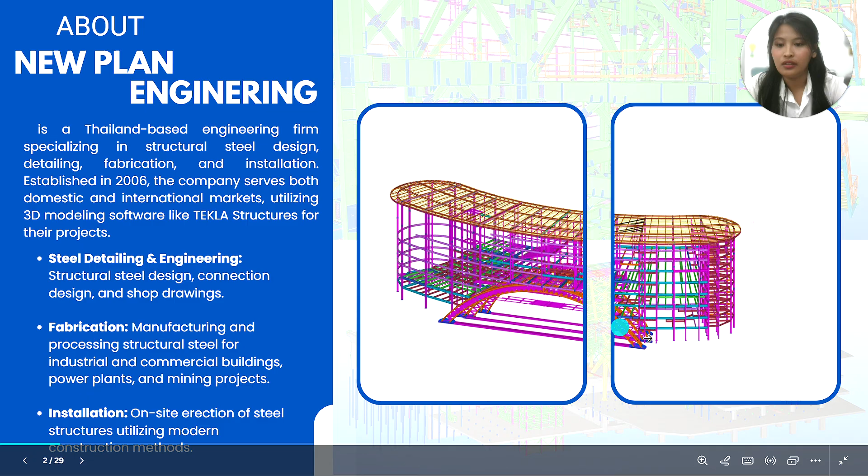So let's talk about my company. My company is a small engineering firm specializing in steel design, detailing, fabrication, and installation using Tekla Structures. And about that, Tekla Structures is a BIM software used in architecture, engineering, and other industries.

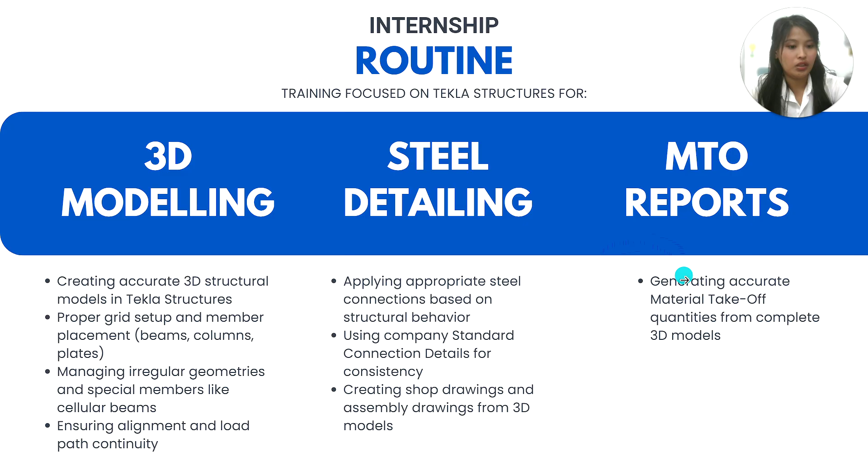So my internship routine includes four. The main one is creating 3D models, like creating accurate 3D structural models in Tekla, like setting up the grid map and placing the members. And next one is detailing. It's when I add the steel connection based on the structural behavior and based on the reference or the STD standard. Another one is MTO report where I generate the material takeoff quantity from the 3D model.

And the last one, the optional one, is drafting, the shop drawing, where I prepare the 3D shop drawing for the 3D model.

My project workflow is like this. So first they will give me a project. The first thing I do is check the drawing and the specification. After studying that, I will do the 3D model in Tekla Structures. And creating it will actually take 2 to 3, depending on the project. And after making the 3D model, then I add the steel connection if needed.

Okay. Next is the generation of shop drawing. This is optional depending on what I'm assigned. And the other option is the MTO report. And that's the summary of what I do in the workplace.

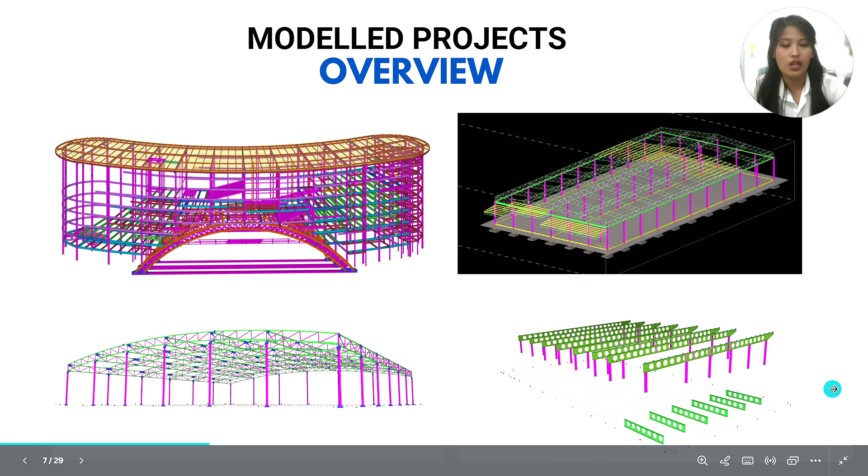Next one is the cellular beam warehouse, which I did the 3D model for the material takeoff. So this is my first time making a cellular beam, which is quite challenging, but it is manageable.

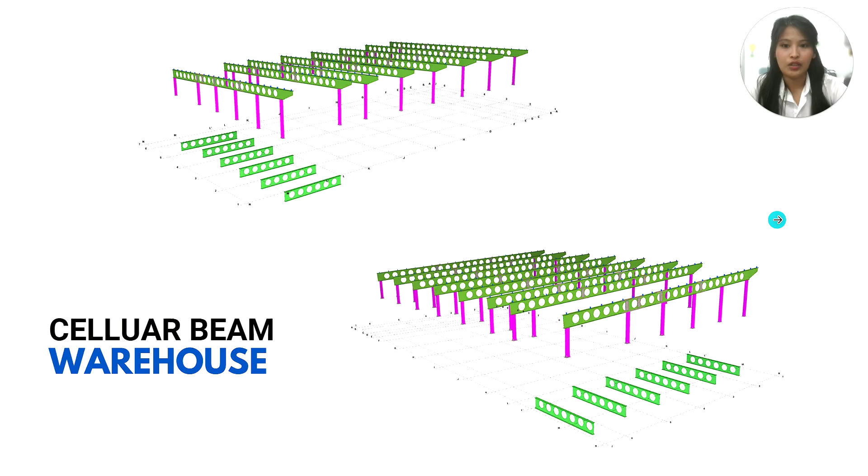And lastly is the TK Park, which took the longest because it took me a month to finalize the 3D model and add the details. So for this one, the most challenging part is the grid line since it's not symmetric. So it was challenging making the grid line for this kind of geometry.

Another one is the arch. Here it has four, which have different sizes. And I also did the stairs detailing as you can see here for the levels of this model or project. For this one, I did the 3D drawing, steel detailing, I added the steel connections, and lastly, I did the MTO report for this project.

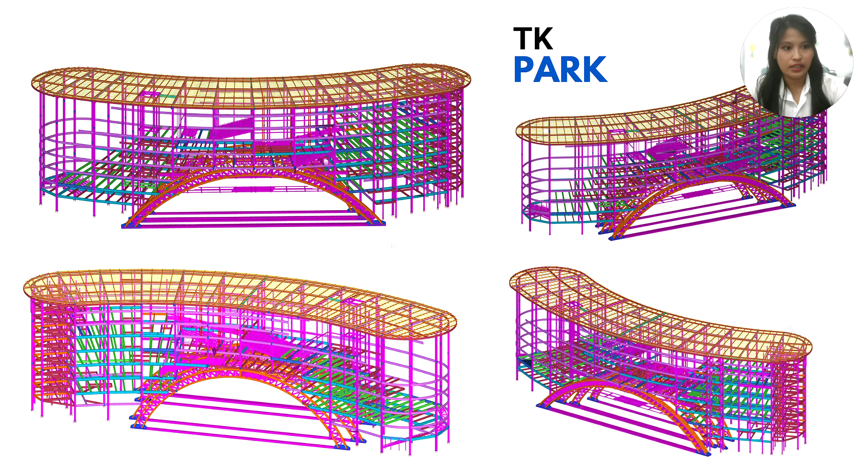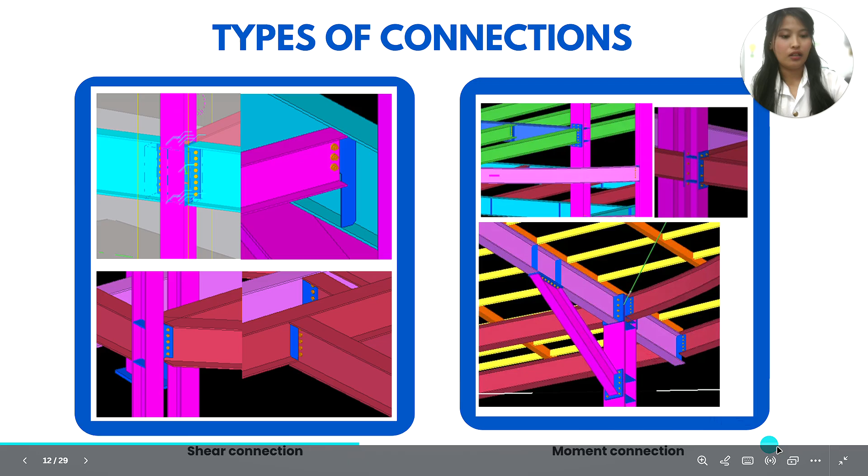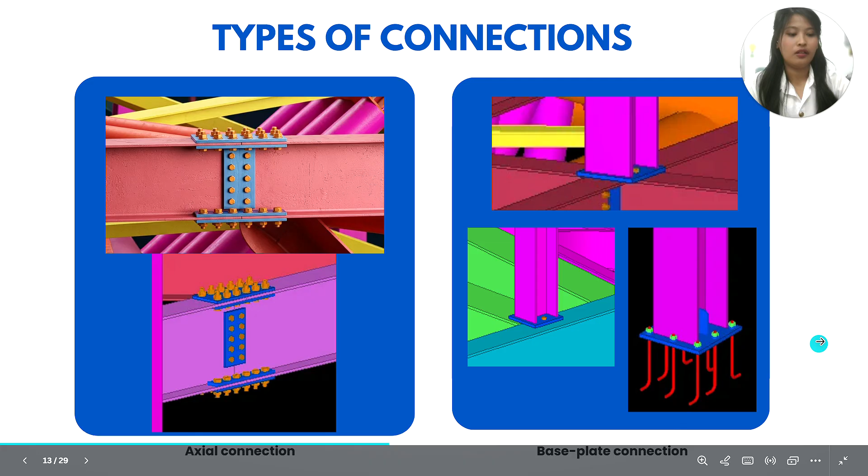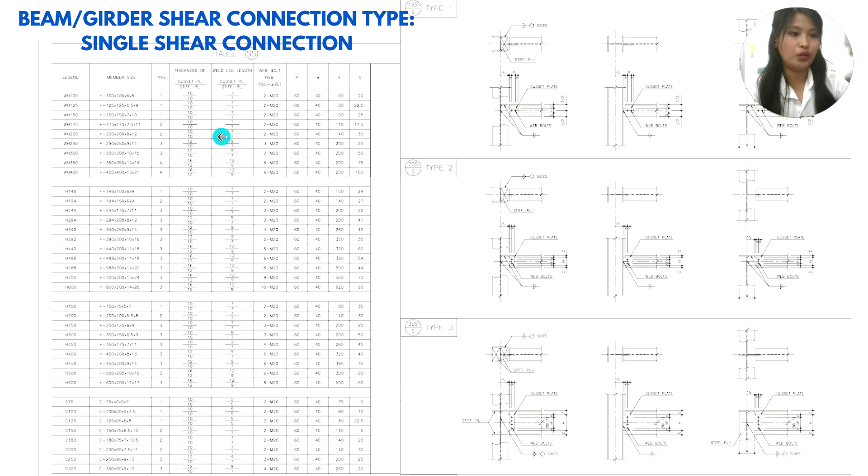So you can check here what kind of member and the type, if it's major or minor. It also shows the thickness of the gusset or stiffener plate here, as well as the number of bolts and the size. You can just follow this and input the information in Tekla Structures.

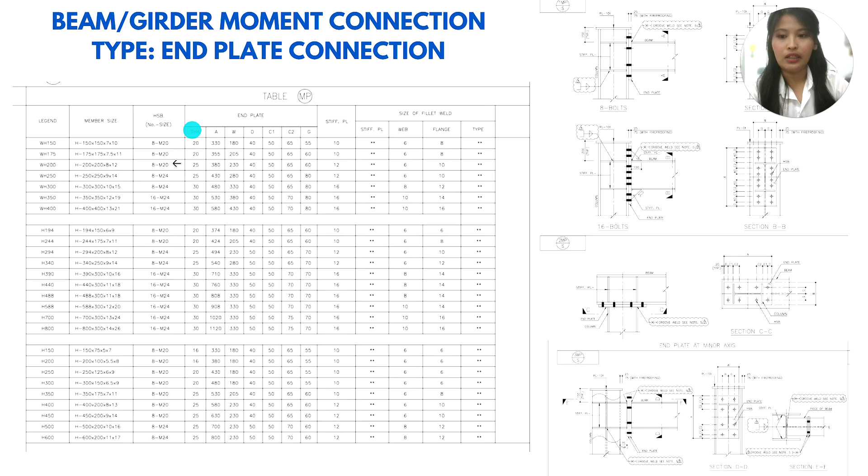And the next one is for the moment connection. This is for the end plate. Here's an example. It looks like this. As well, same, you can see the member size, the size of the bolts, and other information for the type of connection. And this is the actual connection.

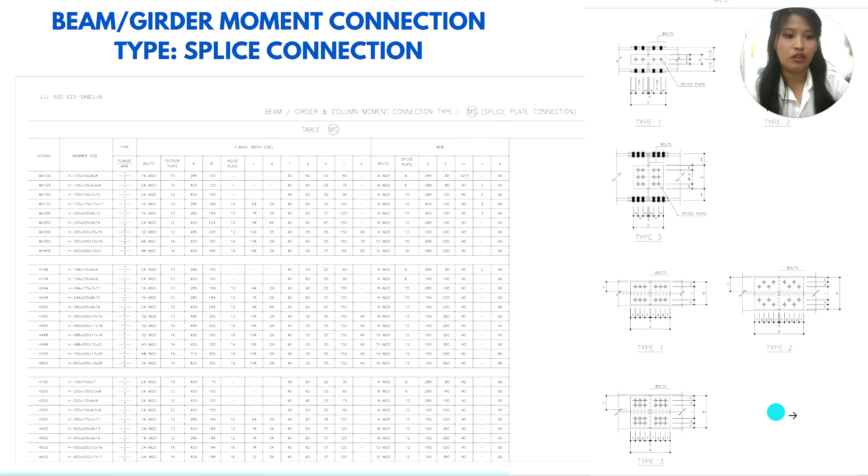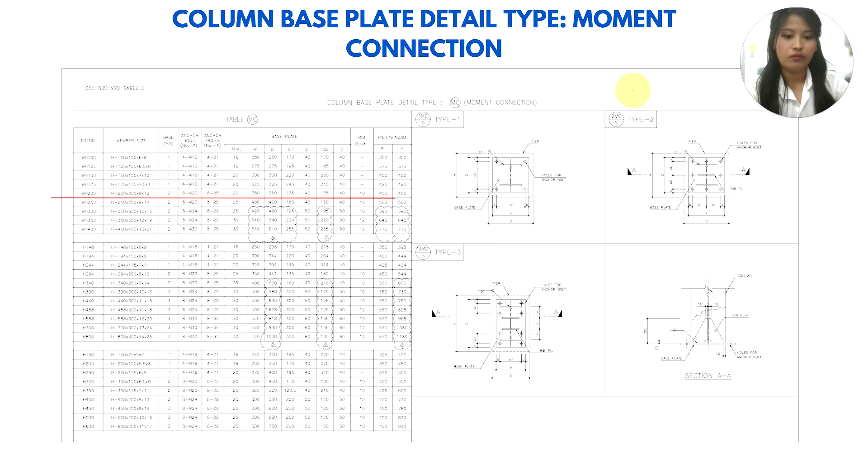We use the splice connection. You can see here. It connects two beams or several beams together. The last one I follow is for the column base plate. This one is for moment. Now for the moment it has anchor rods, and this one is for the base plate for hinge connection if it's on the beam.

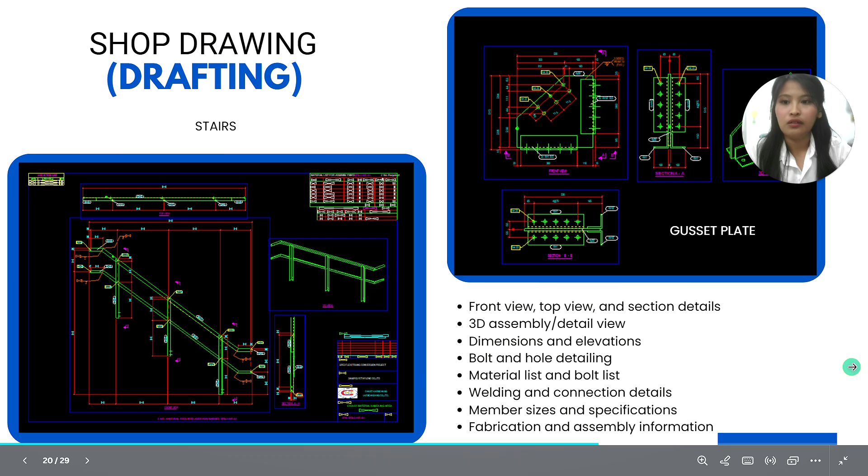So this one is an example when it's printed out. I just covered the information here. It's the name of the company. This one is an example of stairs, the handrail. And this one is also another example of the stair.

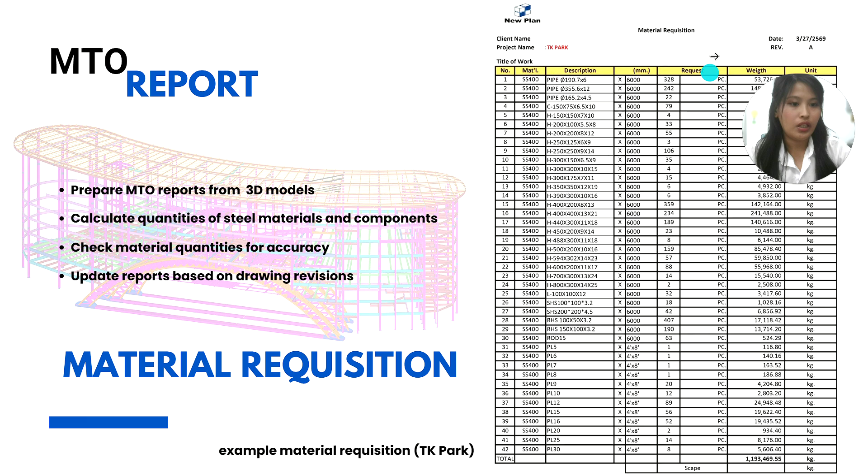And another task they made me do is the MTO report. They made me prepare the MTO report based on the 3D model that I made. So this includes the type of material, which is SS400. And here it includes the description, the length, the number of requests, and the weight and the unit in kilograms. Okay, so the calculation for this one.

Here's an example for steel members such as pipe, beams, or channel. You can calculate it like this. If you have a length of 6 meters and you need a quantity request of 328, you just need to multiply the number of pieces by the weight. The weight is from the TMT Steel book, multiplied by 6 meters. You will get the weight in kilograms.

Next one is for plate. So for plate, for example, PL16, plate 16. So we have 52 pieces. So we'll just multiply 52 pieces by the weight, and the weight here is from the steel book as well. So the weight is consistent because it's based on the same steel book. So just multiply 52 pieces and the weight, which is this number in kilograms. So that's an example.

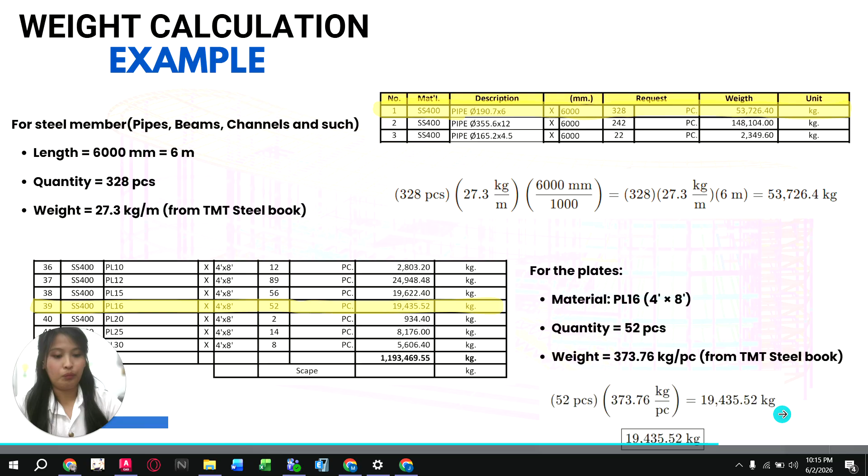So in conclusion, what I accomplished first is I completed 3D modeling using Tekla Structures as someone who just learned the software. One of my biggest accomplishments is learning a new application. Next one is generating material takeoff. And lastly, I applied connections, which is applying the engineering knowledge I learned in the classroom.

And what I learned: I learned from theory and applied it to the real world. I also learned that small details matter because, for example, one missing bolt can affect the entire project or the quantity of the material takeoff. So when I do the material takeoff, they check my work and then give me advice, which is helpful.

Third one is precision and attention to detail. What I learned is that I need to study the material or the drawing thoroughly, and if I have any questions, I should ask the seniors in the workplace. And lastly, how I grew. When it comes to unfamiliar software, I learned to overcome it by practicing and staying consistent. And also, I try to overcome language barriers, so I try to learn their language and talk to them when I have questions.